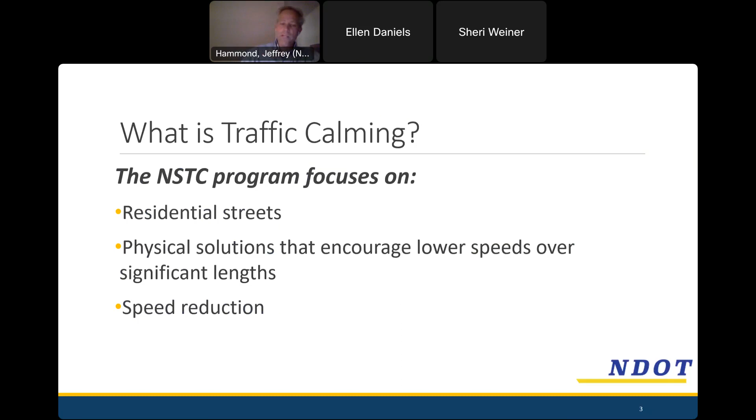And then we do focus on speeding. That seems pretty obvious, but sometimes people engage the program hoping we can push traffic to some other street in some other way. Again, you all are a little bit unique in this. I don't think there's another way out. You're kind of one way in, one way out on this street, more or less. So we really focus on speed and not so much on trying to divert traffic to some other street.

We know that we don't do this in a vacuum. We've got great partners doing other related types of work. We focus on the engineering part, that's the mainstay of what NDOT is all about, things in the right of way. But there's an enforcement component with speeding, obviously, and our partners at MNPD are very supportive of this program. Sometimes we wish they had more resources to park a cruiser and write tickets and do more enforcement, but I know they have a lot of very important work and don't always have the resources to do that. So if we can put something in the right of way that's there 24 hours a day, always working, that's a positive. A lot of people see that as a positive for their street.

There's also an education component with some public service announcements and other things related to speed. That's also an important part of traffic calming as well.

One of the things we like to remind folks about why we do this type of work is simply because of the safety aspect to it. A lot of neighbors see traffic calming as a quality of life issue. It very much is, but there's also a safety component that is very real. We like to show this graphic having to do with the survivability of a crash between a pedestrian and a car, and the chances of you walking away or surviving in any case go way up if that car is traveling at a slower speed. That's true in neighborhoods here as well, where we have a higher possibility of people just out walking, enjoying the evening, or doing things in their neighborhoods.

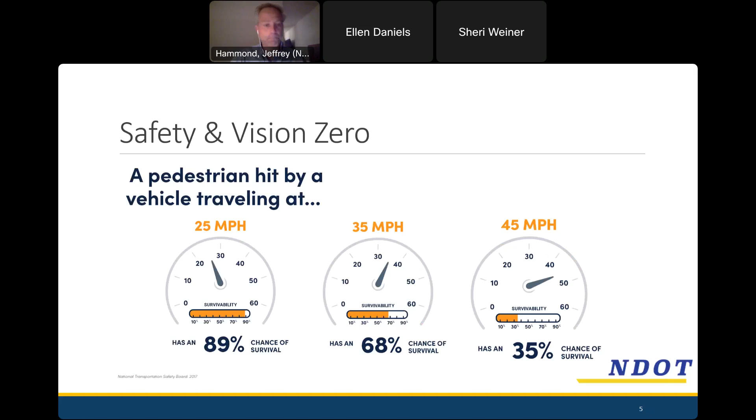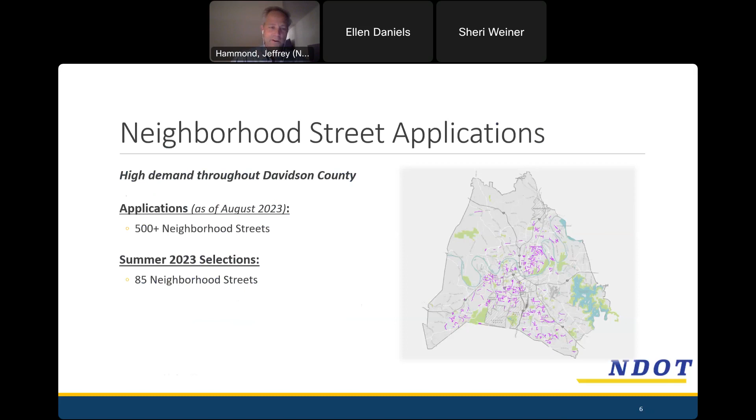Traffic calming continues to be a very popular program. It's a very much requested service of Metro government. In this latest cohort, where Harpeth Valley is one of the streets, we had over 500 requests just like this one for traffic calming. That goes to say that you're not alone in the issues you've been having with speeding. We're aware of those. And with that many requests, that many demands, there is a prioritization process that has to go along with that, so we know which ones are the most stringent. Normally we're doing 50 neighborhoods, 50 streets a year. This past summer, there was some surplus budget funds that council saw fit to allocate toward additional traffic calming projects, so we were able to do a little bit more here lately. But that just means there's a lot of work going on in the traffic calming arena, and so these projects are making their way to the street.

One thing we like to point out is Hub Nashville. If you're not familiar with that, hub.nashville.gov is a great resource for us here in Davidson County. It's basically a clearinghouse for all types of requests of Metro government. You can also call 311, but the website's great and allows you to log those requests. We point this out because sometimes in traffic calming, people may say, well, can we get another stop sign somewhere? Or what we really need is a sidewalk, and all those things are very legitimate requests. But we just don't have the resources to tackle those in this program. Those are done by other offices at NDOT, and so the best way to initiate those types of requests is through Hub Nashville.

But back to the prioritization, where we got so many requests, we have to put a structure to that. This is how we do it. 70% of the score that we attach to each project request comes from the types of data you'd probably figure it comes from: the amount of traffic on a street, the volume, as well as the speed. We measure that with engineering tools every time there is an application window open.

The other 30% of the score comes from some of those other users, like we were talking about, pedestrians in particular. We look at: is there a documented instance of a pedestrian crash? That's 15%. Are there other types of accommodations, such as sidewalks or bikeways, or the lack of those accommodations? You all don't have sidewalks on this street. Probably most of the streets we do traffic calming on do not have any sidewalks, and that raises your score. That makes it more important that we're able to deploy some traffic calming measures. And then the last one is trip destinations. Are there things in the area that make it more likely that there are people walking? Are there parks in the area, schools, transit services? Those types of things also tend to boost your score.

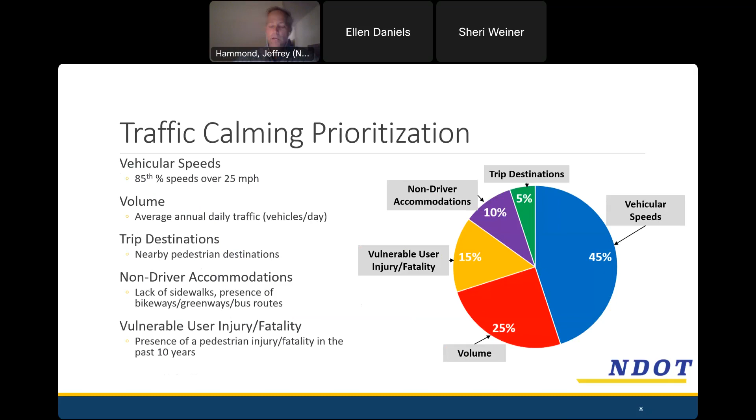In any event, Harpeth Valley is in the program. There's nothing that will change that. We'll talk more about the ballot process and so forth, but this is not a project competing for funding or anything like that. It's simply up to the neighborhood as to whether this is the right tool for you, and you have been introduced into the program at this point.

A little bit of the data specific to your street: the speed that was measured here is 37 miles an hour. The 85th percentile you see there is just a statistical way that in our industry we look at that. What it essentially says is that 15% of the traffic is going faster than 37 miles an hour. We look at all of that for all of the streets and order those. 37 is probably a little above average, even in terms of the streets selected to do traffic calming. So that's a fairly high speed for a residential street like this.

You've got a little over 1,000 cars a day. That often surprises people that you have that much. That really doesn't surprise us. That in fact might be a little below average in terms of the volume we see for these types of projects.

The street width varies a little bit, looks like it's somewhere around 20 to 24 feet wide. That doesn't make a whole lot of difference to us at this point, though it does define the type of traffic calming we might select. But again, pretty typical width for metro streets.

Nothing surprising. It's a little over 8/10 of a mile long, which is on the longer side for one of our projects. Most of ours are around half a mile, maybe 6/10. This one is a little bit longer - nothing unusual about that, but I think it can still be a great traffic calming project.

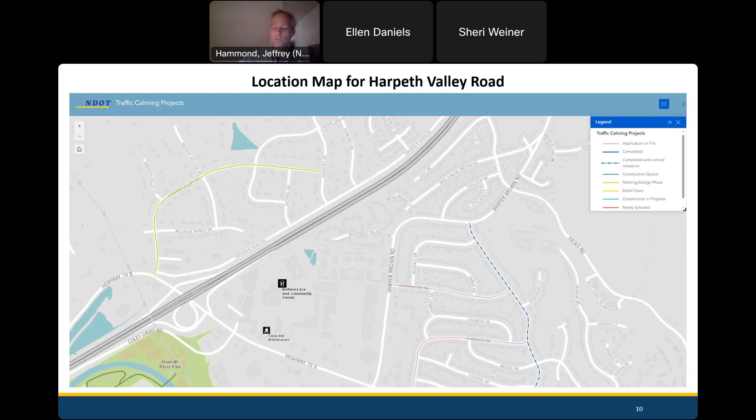The yellow line, which is Harpeth Valley right now, just indicates that it has been accepted into the program, and we're in this stage right now - the meeting and design stage. If you panned around all of Davidson County, you'd see a number of other projects running a similar course as your street.

Just a few of the tools we have available. I'll focus on the ones we have right now in the program or in the concept for Harpeth Valley. This one is the bread and butter of our program. A lot of people engage traffic calming thinking it is the speed cushion program - that's okay, we do a lot of these. This makes up probably 95 to 99% of the projects we do, virtually strictly speed cushion projects.

And that's for good reason - they work and they're known. We have a lot of experience with them at this point, and they hold up well. So for a number of reasons, we like to use this as our go-to feature, and you'll see that Harpeth Valley is no different.

The difference being, the longer we make them, the less aggressive they are - maybe more comfortable, and that's just going to lead to a higher speed. Cars feel more comfortable going at a higher speed over them. The 7-footers are really aggressive, they'll give you a pretty good jolt. We reserve those for use in more urban areas where we're really looking for a 12 to 15 mile an hour speed at the point of the speed cushions. But 10.5 is our standard - we use that in most cases.

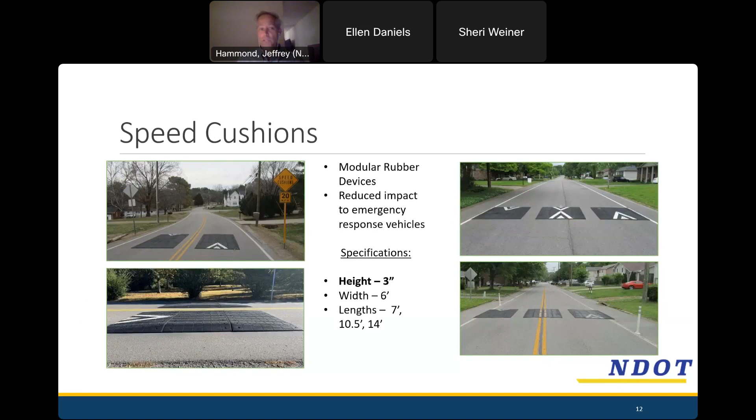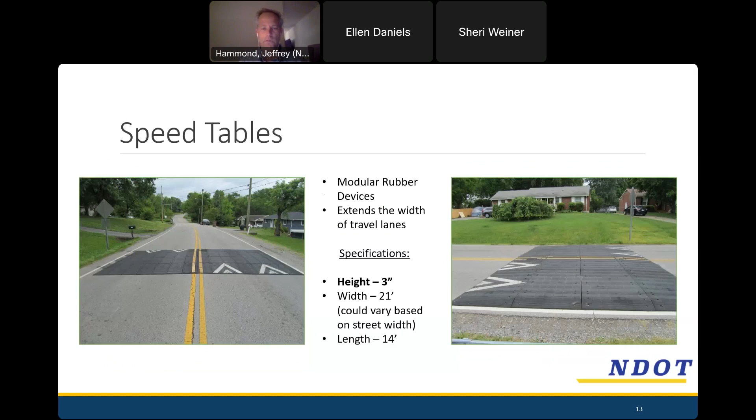But speed tables don't do that, they are one solid piece. There are very occasional times when this makes sense. I think Parks is using these more in some of their park areas where emergency vehicle access wasn't quite the consideration it is for us. But anyway, it remains in our program. They work about the same in terms of the impact on speeds, and this is a little bit of data that speaks to that, which NDOT has collected.

I always take this with a grain of salt, because every application and every street is different. You're starting at 37 miles an hour here, so I'd expect to see a pretty good reduction in speed on this street. If we're starting like we were here with a street that only had 31 miles an hour, you get a little bit lesser differential. But anyway, we're seeing a 9 to 12-mile-an-hour difference in speed. That's great data, but if you just drive on a street that has had speed cushions, you probably see pretty quickly that they're pretty effective.

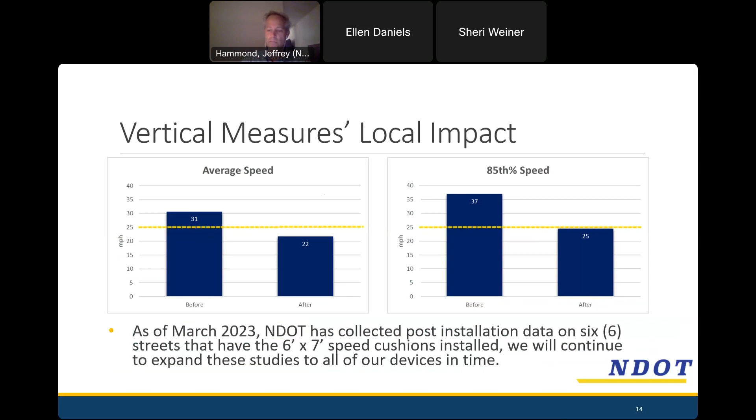We also have radar feedback signs in our toolbox. This gets back into that educational component we talked about. It does what it says it does, as you drive it flashes your speed back up, using radar to do that. There's some data still coming in about the effectiveness of that. I'd say at the outset they're very effective; what remains to be seen is how that holds up over time.

We will use these in places where we generally don't want or can't use speed cushions. We don't put speed cushions on a street with a traffic volume of over 5,000 cars a day. Remember, you have about 1,000, so you're well within that threshold. And if a street is signed at 35 miles an hour or more, we don't do speed cushions. So those are good examples of when we might use a radar feedback sign instead to try and reinforce the speeding aspect.

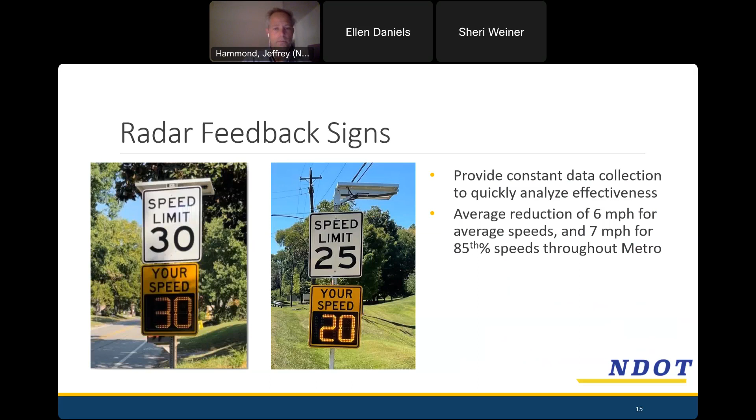Occasionally we'll do pavement markings. We know that if the road is very wide visually, that can lead to some speeding, so sometimes we'll try to trick the driver into thinking the road is narrower than it is. So that has a place.

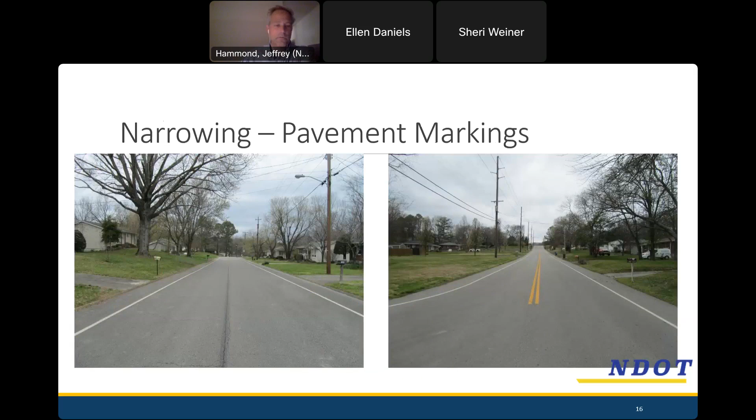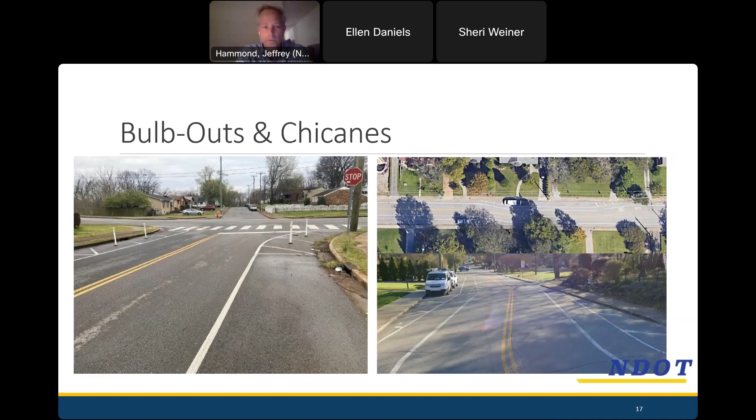In more urban areas, we might use treatments like bulb outs and chicanes that try to make use of what is overly wide pavement in some areas, and that can bring about a slower speed in those neighborhoods.

Another tool we have, though we haven't used it very often recently, is traffic circles. There are some not too far from here that have been constructed in the past few years, but we do that very sparingly. You need an awfully big intersection with a lot of pavement, and we still see some impacts with special vehicles like school buses having a hard time with those, so we just don't do these very often.

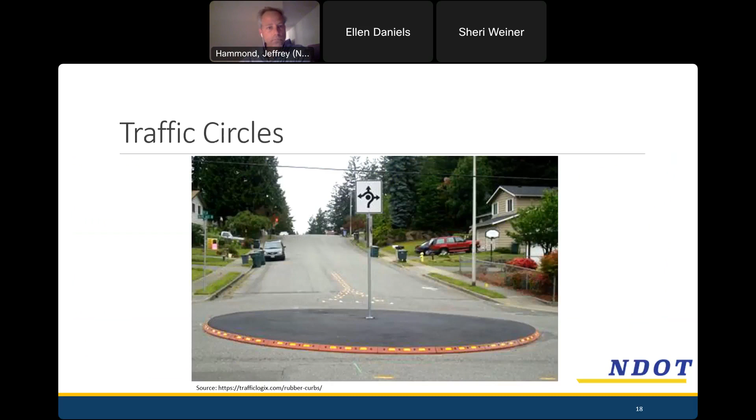That's not so close together that it's overly obnoxious and forces traffic to a different street, but it's close enough together that traffic doesn't clear one set of speed cushions and then hit the gas to get to the next one. They know another one's coming up in about 500 feet, so they just hold their speed and progress at that same slow speed. We're having really good experience with people maintaining that 25 miles an hour generally over the length of the project. So that's how we come up with that.

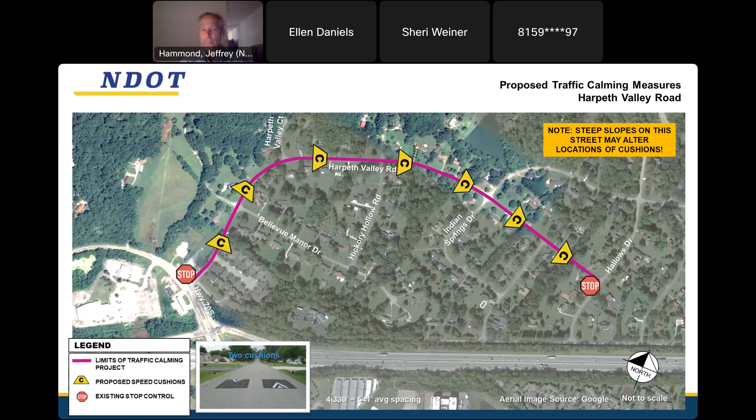What we will be doing after tonight, if you all say that looks about like what we expected, we're going to move on into the design phase, where we will come out and actually take some more detailed measurements and get a much more detailed idea of where we want to put the speed cushions.

They'll look pretty close to what you have here, but we'll actually spot those on the ground, and we will make a set of design plans available to you via the website, with information down to the detail of, for example, this set of speed cushions will be 67 feet from the driveway at 123 Harpeth Valley. It'll be that level of detail, so if you're interested and want to know exactly where the speed cushions will go, you will have that information available.

That will be on the website along with, once the ballot comes out, that will be available. We don't ballot unless we've got the design plans, where somebody can get in there and get as much information as they want about the project. Once that's ready, we'll release the online ballot, and again, that stays open for 6 weeks. Then after that, assuming it's a successful vote, we will move it into the construction queue.

And that's where the bad news comes. Right now, after the close of these ballots, we're still sitting at about a year of lead time. I think NDOT is cutting into that — they've been working really hard to try different ways. It's a contractor issue; they just don't have the manpower or contracting ability, so they're working with the contractors they have to move those projects faster. But I just say that so you don't think by summertime you're going to have traffic calming. It's probably not going to happen — it'll be a little longer than that.

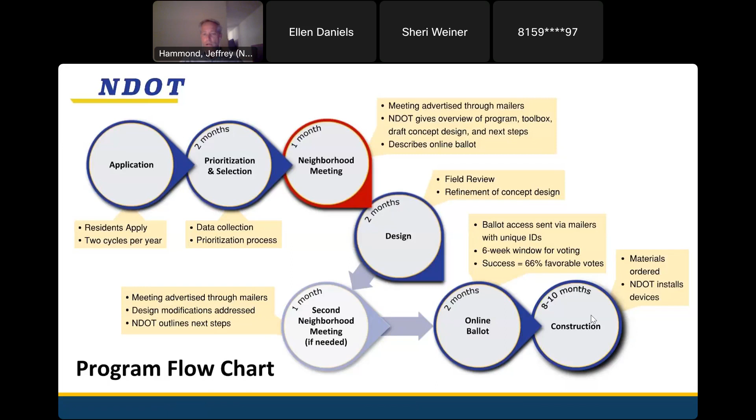There's a lot of information there — process manuals, that map I showed you, and you can see other neighborhood design plans if you want to see that level of detail. They've even got the historical voting records, how many neighborhoods have passed and failed, so you can see all of that if you're interested. That's also where you'll find a link to this meeting in the next couple of days, so if you want to direct someone to watch this meeting, that will be available there.

Anything else? I don't want to keep you, but I don't want to shortchange you either — so any other questions, comments, or concerns?

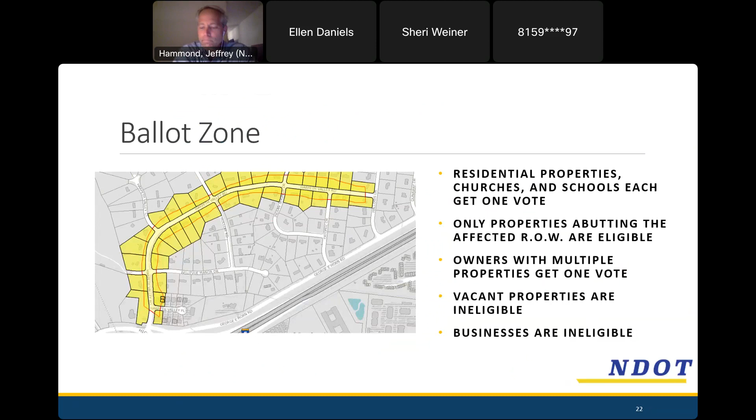Well, we certainly appreciate your time here and your interest in the project and in safer streets. Feel free again to reach out in the meantime if we can be of use. I'm going to proceed on the assumption that we'll move into that design phase, get those plans in order, post them, and then move into the ballot process. But if you have any concerns about that, feel free to reach out.

That sounds great, Jeff, thank you so much. Great, well, thank you all, and appreciate it again. Hope you have a great rest of your evening. Thanks, thanks Jeff. Bye guys, bye Sheri, thank you. You're welcome anytime.